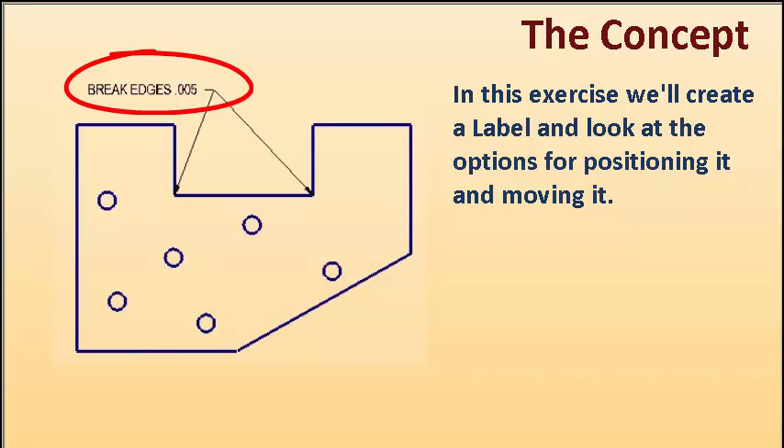In this exercise, we'll create a label and look at the options for positioning and moving it. We'll start with a drawing that looks like this and turn off level 5 to remove the dimensions from the display.

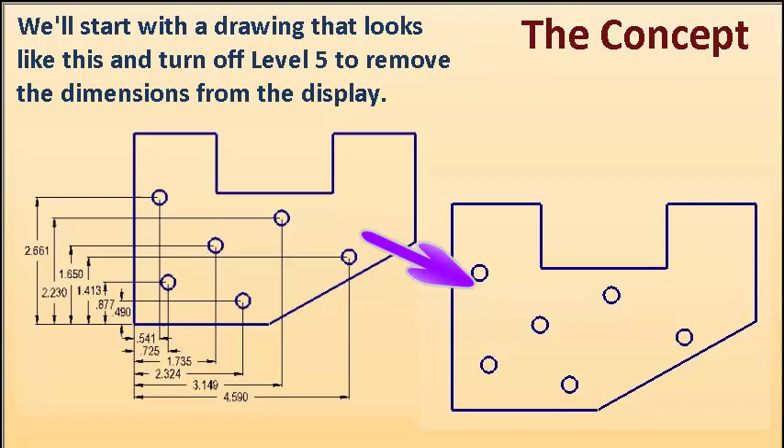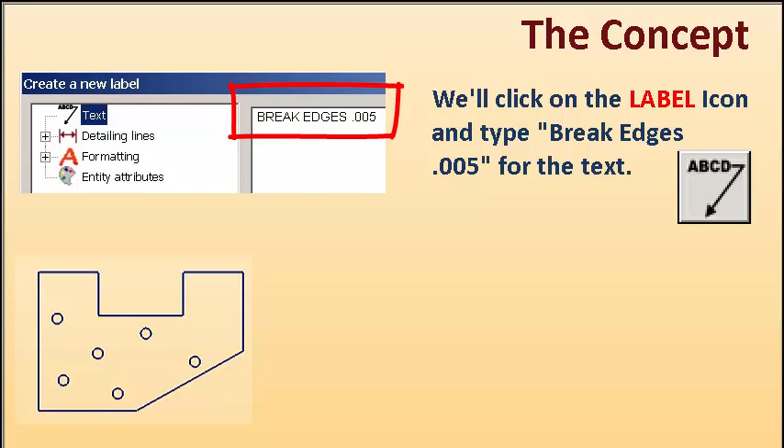We'll click on the label icon and type break edges 0.005 for the text. We'll pick an inside corner on the part and then click to place the label text. We can then pick additional locations for leader arrows.

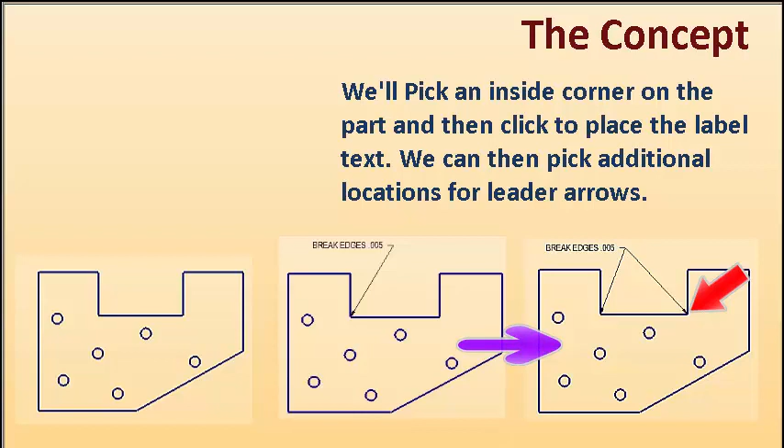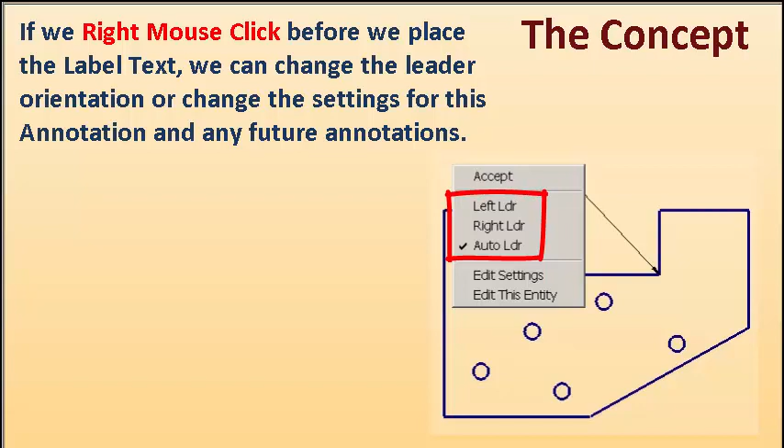If we right mouse click before we place the label text, we can change the leader orientation or change the settings for this annotation and any future annotations. After we place the label, we'll click on the generic edit icon. We can then make changes to the label.

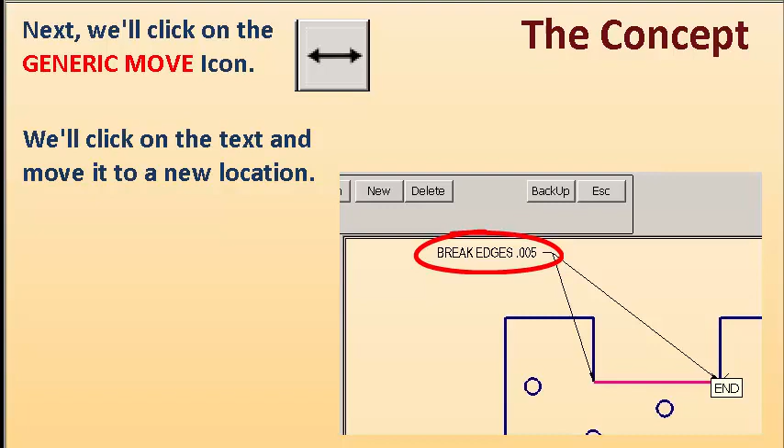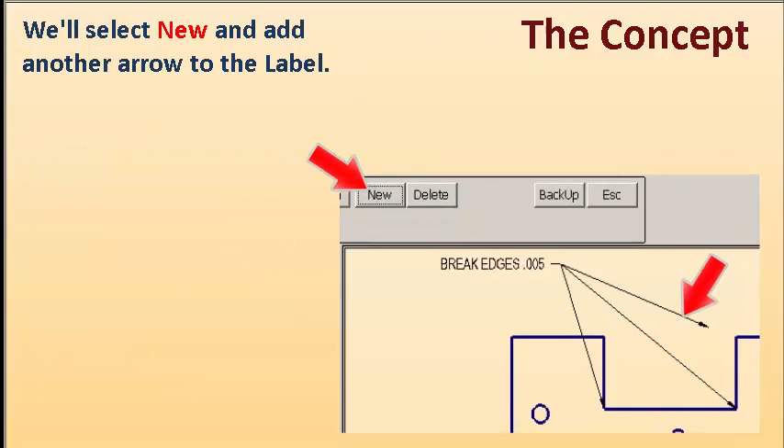Next, we'll click on the generic move icon. We'll click on the text and move it to a new location. Then we'll click on one of the label arrows. Two additional options appear on the conversation bar. We'll select New and add another arrow to the label. If we select Delete, the selected arrow is removed from the label.

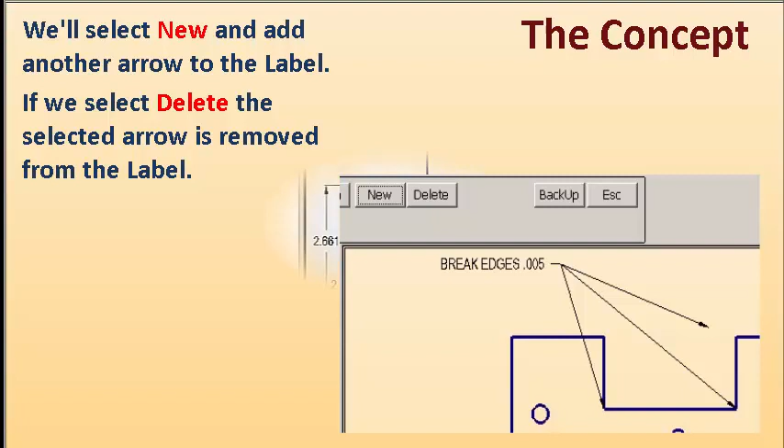So let's work with an actual file. We'll open up sample file KCV drawing10.ckd. Let's turn off level 5. We're going to click on the toggle splitter to remove the level list from the display.

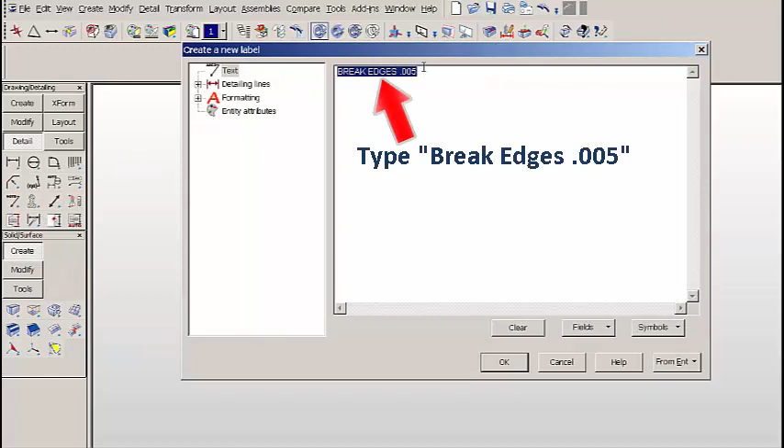Now let's click on the label icon and we'll type break edges 0.005. If we click on the formatting, we could change the font, etc. for the label.

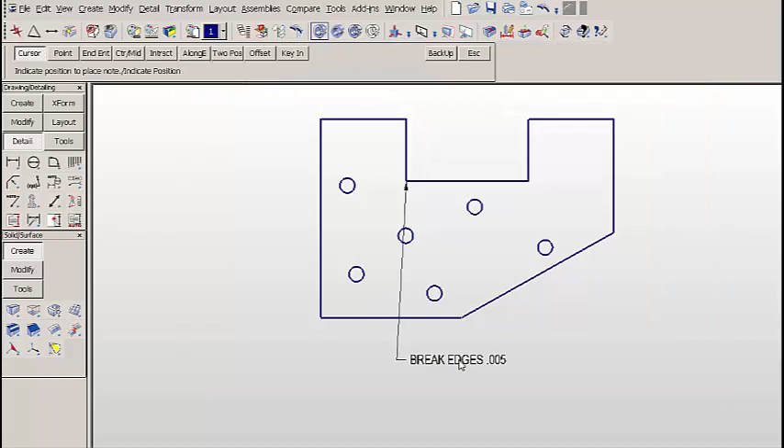Now let's click on this corner to place an arrow and then click to place the label. And before we click, if we right mouse click, we'll see there's multiple options there. So let's click to place the label, and then we'll click to place a second arrow, and then click on Done.

Now let's click on the generic edit. After you make a label, if you use generic edit, you can go back and also change many of the options in the label, the font, etc.

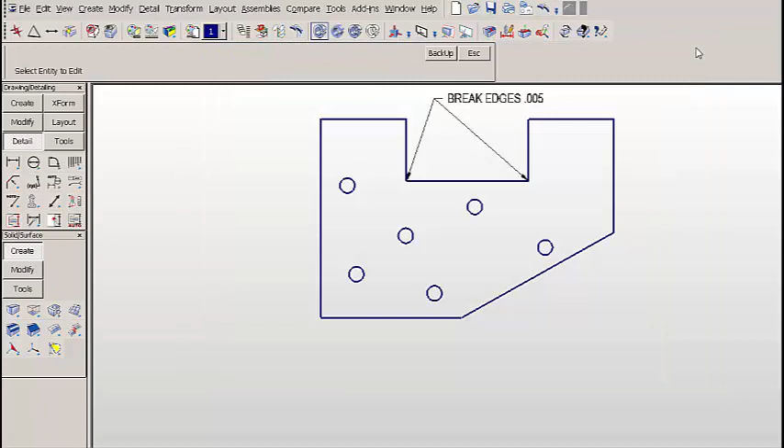Now let's click on generic move. If we click on the text of the label, we can reposition it. If we right mouse click, we can change the leader orientation as we're moving that text.

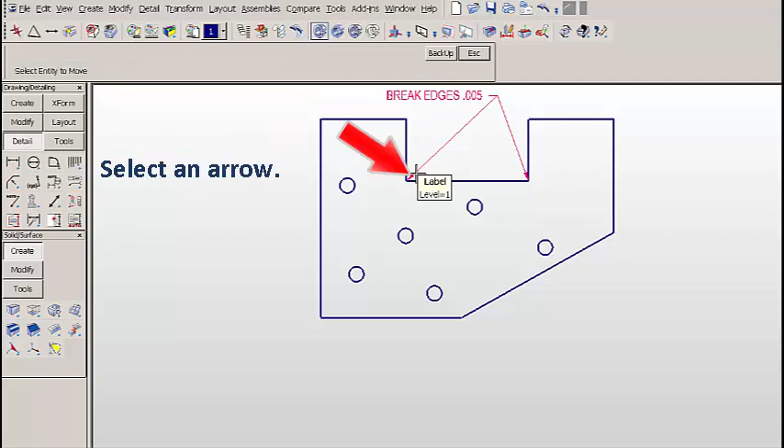If we select an arrow with the generic move, notice two new options appear. If we click New, it allows us to add an additional arrow. Let's select another arrow and click on Delete. That'll get rid of the arrow.

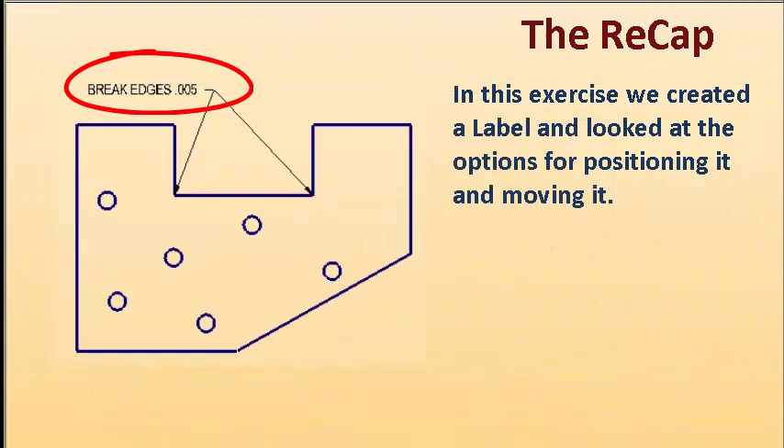It's pretty easy to do. Let's recap. In this exercise, we created a label and looked at the options for positioning it and moving it. We started with a drawing that looked like this and turned off level 5 to remove the dimensions from the display.

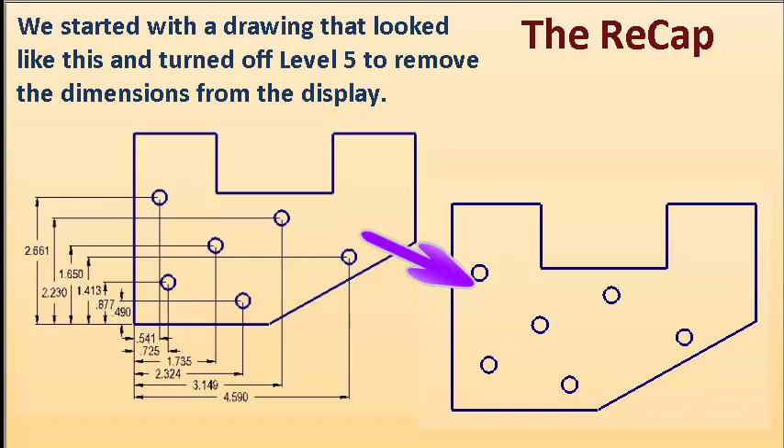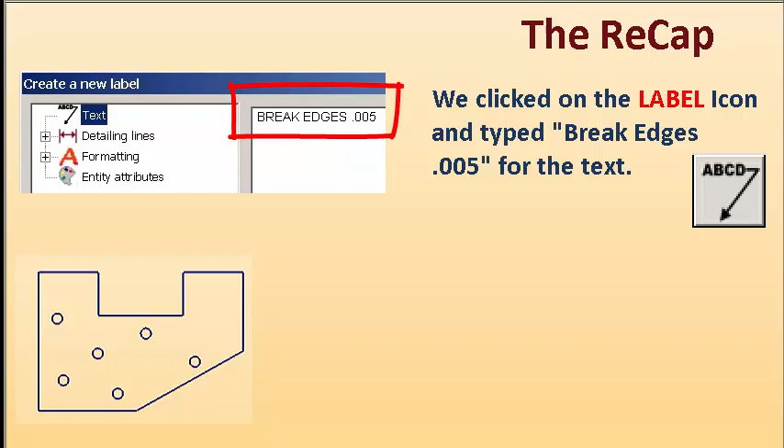We clicked on the label icon and typed break edges 0.005 for the text. We picked an inside corner on the part and then clicked to place the label text. We then picked another location for a leader arrow.

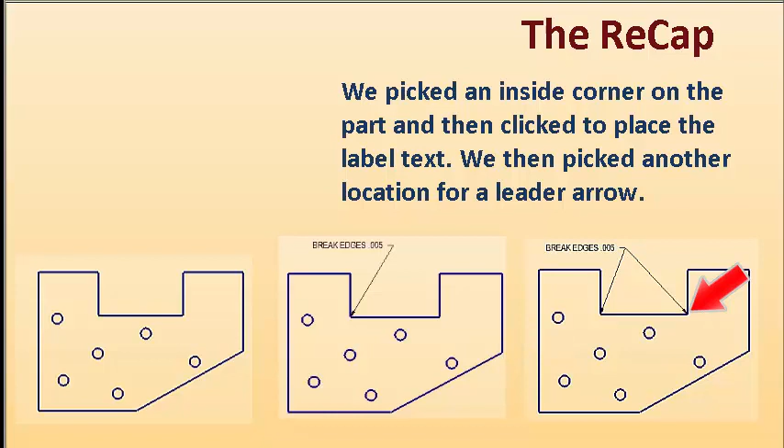If we right mouse click before we place the label text, we can change the leader orientation or change the settings for this annotation and any future annotations. After we placed the label, we clicked on the generic edit icon. This allowed us to make changes to the label.

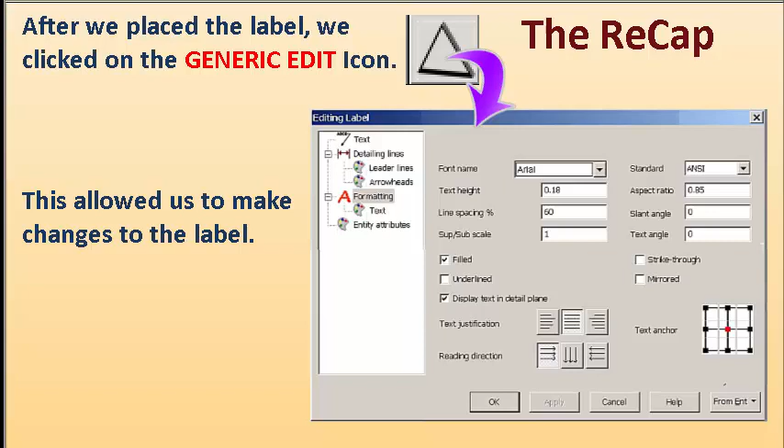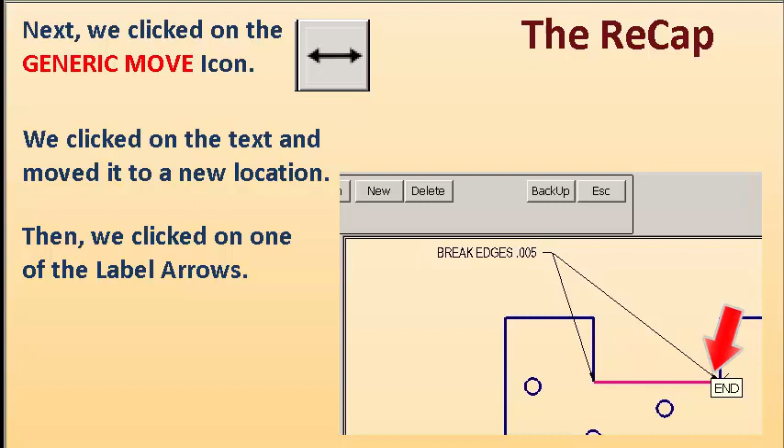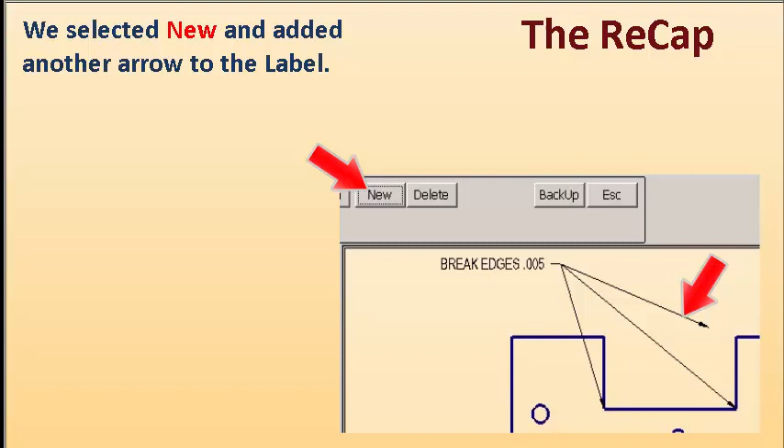Next, we clicked on the generic move icon. We clicked on the text and moved it to a new location. Then we clicked on one of the label arrows. Two additional options appeared on the conversation bar. We selected New and added another arrow to the label. Next, we selected another arrow and then Delete to eliminate that arrow.

So you can see you have many options when working with labels in KeyCreator.